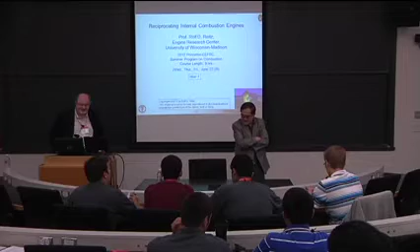It's very nostalgic for me because Professor Reitz and I professionally grew up at the same time period. He's a little bit younger than me - I don't look it. That's in the 70s, mid-70s, late 70s, and early 80s. Those times there was an energy crisis - you guys probably don't know the energy crisis. And it was at the beginning of the golden era in combustion. There's several periods of golden era, and that's one of them. It started from mid-70s.

The mathematicians started doing asymptotics of flame structures. That's the time they started doing that. And then the laser folks from the physics communities, and then computation. It's during that time Professor Reitz came to Princeton, and I came to Princeton too.

After I graduated, I first went to GM to work. I wanted to solve the world's problems, but then I thought I'd do that instead - so I came back to Princeton. That's a career thinking, it's okay. I took a big cut in salary. I came here as a postdoc, but that was the best move.

Princeton was really a very exciting place, even now. I have a colleague, Professor Fred Bracco. Professor Reitz was in his group at that time. And that was when they proposed and started doing computational simulation of what happens in engines, and also used lasers to see what happens there. That's the beginning - not every major engine lab had those things: computational simulation of what happens in engines, and laser analysis. That's the time we started.

So why are we interested in internal combustion engines? As you all know, society relies on internal combustion engines very heavily for transportation, commerce, and power generation. In fact, if you look at this list here, you'll see that they are really pervasive. And that's another reason why the Engine Research Center has been around so long, more than 60 or 70 years, because engines are so important to our society.

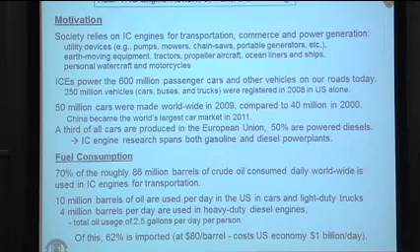They power, for example, the 600 million passenger cars that we have on the roads in the world today. And if you just look in the United States, we have 250 million vehicles. That's roughly one per person. 50 million cars were made in the world in 2009, and you can see that's up significantly from 2000.

And things are changing. China became the world's largest car market in 2011. A third of the cars produced are produced in the European Union, and 50% of those are powered by diesels. So when we talk about engines, we have to worry about both gasoline and diesel engines.

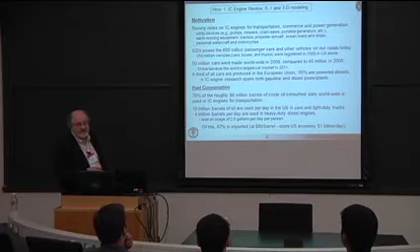Of course, along with this huge number of vehicles and engines comes fuel consumption. 70% of the roughly 86 million barrels of crude oil that we consume every day are used in IC engines for some sort of transportation. And in the US, 10 million barrels are used per day in cars and light-duty trucks, 4 million in heavy-duty vehicles. So it works out to about 2.5 gallons for every person in the United States every day.

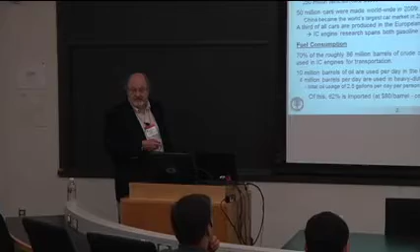And of course, we don't have a lot of it here in the US, so 62% of this is imported. And if you pick a price, here I just picked $80 a barrel, that's about $1 billion a day that we spend on imported oil.

This chart, you can spend hours on, and I suggest you look at it later. It's a very interesting chart out of Lawrence Livermore, I believe. But anyway, it talks about how energy is used in the United States. You'll see that we use 100 exajoules of energy in the year, and it's partitioned in this way here.

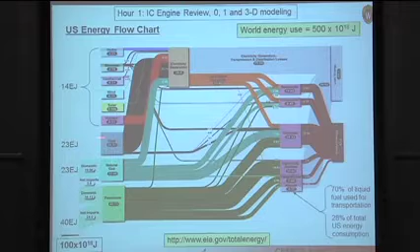40 out of the 100 is in the form of petroleum, and of course 70% of that is used for transportation, as we just said, light duty, freight, and so on. If you look at the other forms of energy, natural gas is about a quarter, coal is about a quarter, and then all of these combined, solar, nuclear, wind, and so on, are about 14. This is a nice number because it's nice and round here, so you can convert these into percentages very easily.

The United States uses 1/5 of the world's energy, so it puts that into perspective. So we're talking about transportation representing about 28 or 30% of the United States' energy consumption. The other interesting thing about this plot is comparing the gray and the brown regions here. The brown regions are useful work. The gray regions are energy that is thrown away.

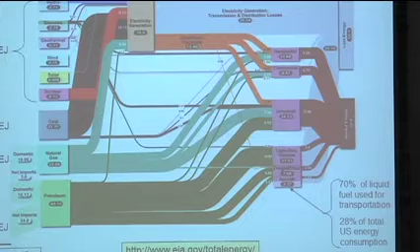And you can see that roughly 60% or 55% of the 100 exajoules here is just thrown away because of losses that occur. So if somebody tells you, oh, they're going to plug in their hybrid vehicle and it's going to be a really efficient car, you've got to go back to this diagram and realize that in creating the electricity, you've already thrown away a huge amount of energy. From that point of view, going from petroleum to a car is actually interestingly efficient.

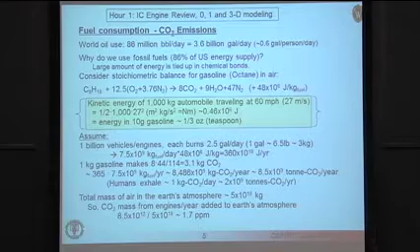So fuel consumption kind of goes along with CO2 emissions. This slide here is just for fun. We're using 86 million barrels a day. That works out to 3.6 billion gallons in the world, about 0.6 gallons per person per day. Remember I said in the US we use 2.5 gallons. So we're kind of using a lot more than our share.

Why do we use fossil fuels? Well, as you know from just looking at this simple balance equation here, we get 48 megajoules per kilogram of fuel from, say, isooctane. What does that mean? Well, if you compare the kinetic energy of a 1,000 kilogram automobile traveling at 60 miles per hour, it works out to about the amount of energy in 1/3 of an ounce, or a teaspoon, of isooctane or gasoline. So a huge amount of energy comes from breaking these bonds and creating CO2 and water.

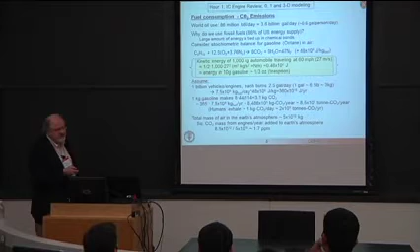So here, this is also interesting. If we compare the CO2 that's produced, 1 billion vehicles, let's just pick that number as a rough number, and let's say that we're burning at the US rate, 2.5 gallons a day, you can figure out that that corresponds to about 8.5 billion tons of CO2 that's deposited into the atmosphere every year. So there's another device that uses energy, the human. We exhale, or our exhaust product, CO2 as well, right? We put out about 2 billion tons of CO2 per year.

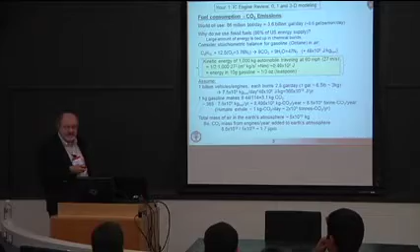It's kind of interesting to look at those numbers because you realize that humans actually put out a lot of exhaust gas. In fact, this is a very rough estimate. The estimates range between 15 and 20% of the total CO2 comes from us breathing. You wonder, well, why? Where's all that CO2 coming from? Well, all that energy that we said that we were consuming that goes into agriculture and transportation and so on, eventually goes to feed us, and we provide CO2.

So if you combine all of these things and do a rough estimate, you can see that every year we're adding about 1.7 parts per million of CO2 to the atmosphere, which is about what people measure. So this is a problem that's not just automobiles.

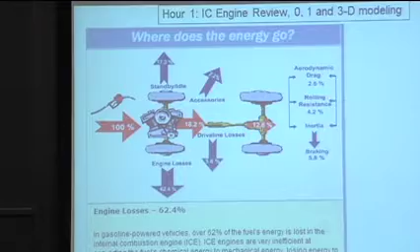If you look at the energy and where it goes, this is a picture that is very illustrative. If we take the fuel as being 100%, and of course it's not, right? Because in order to get the fuel to the gas station, we already lost about 20% from the well to the gas station. But let's just say we had 100% of the energy there. What comes out of the engine is about 18.2% out of this 100. Big loss is the engine. 62.4% is thrown away in the engine, in your typical spark ignition engine.

17% goes in basically standby idle. If you then consider the losses in the driveline, another 5% there, what eventually makes it to the wheels is 12.6% of the total 100. And this is partitioned into aerodynamic drag, overcoming that, rolling resistance, and so on, braking. So if you add this, plus I guess it's useful work, your accessories, air conditioning, and so on, you find that it's about roughly 16% of the total fuel here is actually doing anything useful.

Actually, that number is an overestimate. Professor Heywood has an example where he concludes that actually it's about 1% efficient. Because if you look at what the weight is of a car, it's about 4,000 pounds, typical car, and the average occupancy per person, the weight of the person, and what's required to move that person, you find that the 16% times that weight ratio works out to about 1%. So cars are really inefficient, but we love them.

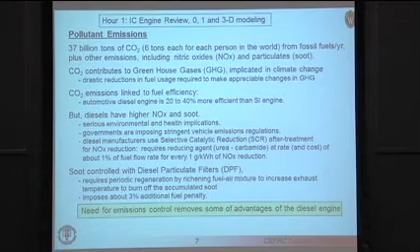Okay, so along with this huge use of fuel is the production of CO2. As I mentioned, 37 billion tons of CO2, about 6 tons per person in the world per year. Of course, other emissions are also produced, nitric oxides, particulates, and there's a lot of discussion about those. Well, CO2 is implicated, as you know from, I'm sure, many of the discussions this week, implicated in climate change. And of course, it's linked directly to fuel efficiency. So you want to look at your engine efficiency.

Diesel engines are 20 to 40% more efficient than spark ignition engines. So that makes the case for diesel engines. However, diesel engines have higher NOx, nitric oxides, which are also implicated in environmental issues, and particulates. So they have serious environmental and health implications. There have been significant efforts to clean up diesel engines, and in 2010, for example, the United States EPA set very tight legislation, with the result that diesel manufacturers now use a variety of methodologies, for example, selective catalytic reduction after treatment for NOx reduction. We'll talk a little about that.

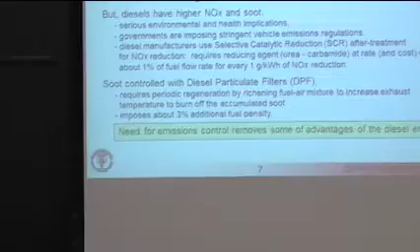This uses a reducing agent, carbamide or urea. And it's not free, right? This is basically the same cost as diesel fuel. And essentially, you have to take that into account when you start looking at fuel efficiency. Also, soot is controlled with filters that have to be regenerated, essentially burn the stuff off the filter. And this imposes additional fuel penalties. When you add these penalties together, this 20 to 40% here is reduced. And that reduces some of the advantages of the diesel, but the diesel is still the most efficient engine known to man.

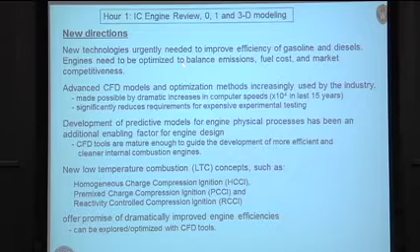So you can see that because of the huge quantities of fuel that we use and the impact on the environment, new technologies are urgently needed to improve the efficiency of engines. We need to optimize these engines to balance the emissions, the fuel cost, and market competitiveness. What I'm going to tell you about in these series of lectures is some of the work that is going on in the area of CFD modeling of engines.

This technology is increasingly being used by the industry to reduce the time that it takes from the inception of an idea to the production of a new engine, and made possible by drastic increases in computer speed. In the last 15 years, 10,000 times faster computers than were used back then.

And this significantly reduces the need for expensive testing. Well, another factor is that the physical processes that occur in an engine are now better understood, and the CFD tools are becoming mature enough to help in the development of cleaner engines and more efficient engines.

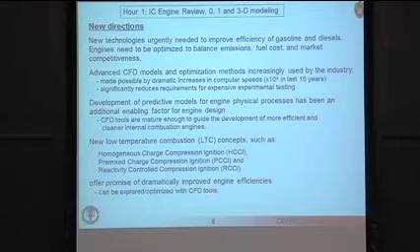New engine concepts have emerged, such as homogeneous charge, premixed charge compression ignition, reactivity-controlled compression ignition, and we'll be talking about some of these. They offer dramatically improved engine efficiencies and can be themselves optimized with the use of CFD tools.

Okay, so let's just talk a little bit about CFD. As Ed mentioned, in the mid-70s, we had the so-called Arab oil crisis here in the US. I remember living here in Princeton at the time. They were rationing gas. You could only buy 5 gallons at a time. And worse than that, the only place you could get it was on the New Jersey Turnpike.

So you'd have to drive down there to the closest exit, fill up your tank, and then use a significant part of that to get back home again. So it was actually a significant event in the history of the United States. And the government essentially said, we need to solve this problem. Let's get the national labs to convert some of the defense codes, the weapons codes, into codes that can be used for engine design by the automotive industry.

So the Los Alamos National Lab and several universities and automotive companies got together, produced a whole series of codes culminating in these Kiva codes that are still to this day widely used in the industry. Other open source codes have appeared, such as OpenFOAM, widely used in Europe.

Along the way, entrepreneurs saw the advantage of commercial codes, and at Imperial College and other places in Europe, codes were developed and commercialized, such as StarCD, the AVL Fire Code, Ricardo's Vectis Code. Fluent was also a player. And then more recently, Converge, Forte, and a number of other commercial codes are available for engine simulation.

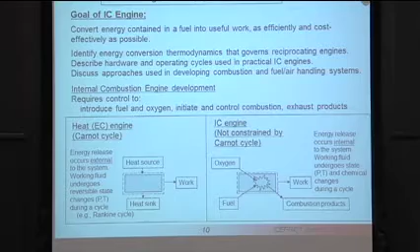A variety of meetings where people congregate to discuss developments in CFD engine simulation, such as the International Multidimensional Modeling User Group meeting sponsored by Cray, and various other Society of Automotive Engineers meetings. Okay, so that's kind of a background on the history of CFD codes. What is it that they're trying to do?

Well, if you look back at what an IC engine does, you want to essentially convert the energy contained in the fuel into useful work as efficiently and cost-effectively as possible. To do this, you have to basically identify the thermodynamics that govern reciprocating engines, describe the hardware and the operating cycles, and then essentially look at the approaches used to develop combustion and air handling systems.

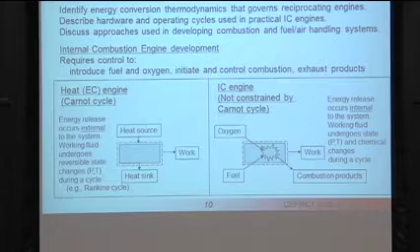So the picture on the right here basically summarizes an internal combustion engine. You have oxygen, you have fuel. They are mixed in some way in the engine. Combustion is initiated and leads to products, and one extracts work. And the important thing to realize here is that the energy release is internal to the system. The working fluid undergoes a change of state from fuel, oxygen to products. And of course, work is extracted during a cycle.

And so some of the restrictions associated with the Carnot cycle do not carry over to the IC engine, and vice versa. So just something to remember, that your textbook Carnot cycle is not necessarily the whole story when it comes to internal combustion engines.

So I'm glad to see many hands were up there, so we don't have to spend a lot of time on this slide. Basically, reciprocating internal combustion engine. We have our piston. Here's the combustion space. We're showing the piston here at top dead center. As the crank rotates, the piston slides up and down. Here's bottom dead center. The air introduction is handled through the opening and closing of intake valves, and exhaust, the same thing.

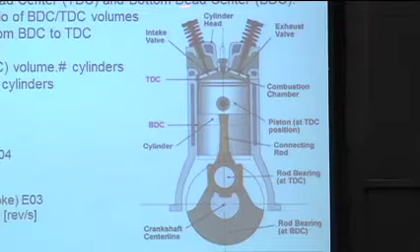Some of the definitions here, we've got top dead center, bottom dead center. Compression ratio is basically the ratio of these two volumes, the top dead center and the bottom dead center volume. The stroke is the distance that the piston travels in a cycle. The bore is the diameter of the piston. The displacement would be the change in volume times the number of cylinders.

And then we have some definitions here, P being the brake power, typically measured in kilowatts. The torque, or brake torque, would be in Newton meters, which is the work that we spoke about in the previous slide. Then there's the brake mean effective pressure, which is essentially a way of gauging the force that's transmitted by the high pressure gases to the piston. The mass flow rate of fuel, grams per hour, and the brake specific fuel consumption. So these are all metrics that we need to take into account when we're discussing engines.

The power is basically the rate of work, so work times the engine speed N here, or torque times speed gives you the power, and here's an equation, if the torque is in Newton meters, speed in RPM. The brake mean effective pressure is the power divided by displacement and the speed. And here again, depending on whether you have a 4-stroke engine or a 2-stroke engine, there's a factor of 2 difference there because we have 4 cycles or 2.

Brake-specific fuel consumption is just a normalization widely used in the industry, which is the fuel flow rate divided by the power. So you'll see BSFC in grams per kilowatt hour. So I spoke about brake. This is what you would measure on a dynamometer, for example, the power produced by the engine. You have brake power.

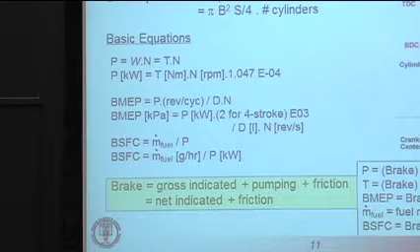As we'll see, the brake is made up of several components. The gross indicated power, or brake quantity, refers to looking at the pressure and its effect on the piston. So that would be essentially the work associated with the thermodynamic side of the cycle. Then in order to get the air in and out of the engine, there's a pumping component that we need to worry about. And then finally, friction. You'll see in many cases the gross and the pumping are connected together, and one sees net indicated for the sum of gross and pumping.

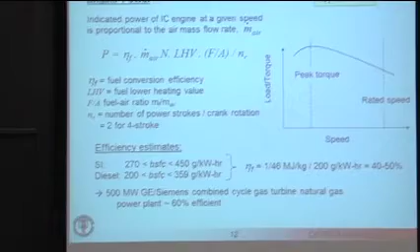Okay, so engine power then, the indicated power is proportional to the amount of air you can get in the engine. So this m dot air is an important parameter here. Also the fuel conversion efficiency, or the efficiency of the entire process. The lower heating value of the fuel, and of course engine speed here. That's converting from work to power. The fuel-air ratio, and then whether it's a 2- or 4-stroke engine.

So we're typically interested in several points on the load speed map of an engine. This curve here is typically called the lug curve. Essentially, it tells you the maximum load you can have at a given speed for an engine. There's a peak torque point and a rated speed point that's of interest. Looking at these numbers here, these are just typical numbers that you'd see in the literature for brake-specific fuel consumption for SI and diesel engines.

And you see they range all the way from 450 for SI engine down to 200 for a diesel engine. So one can kind of estimate what the fuel conversion efficiency is. And you see it's in the range of 40 to 50% if we're at this relatively low BSFC of a diesel engine.

It's interesting to compare that number with the number of, say, a 500 megawatt combined cycle gas turbine natural gas power plant. These power plants have just recently broken the 60% efficiency mark. They're combined cycle, so there's regeneration. They feature things like thermal barrier coatings on the turbine blades, and very sophisticated, millions of dollars of investment go into producing one of these power plants. Internal combustion engines can reach up to 50 and even higher for very large engines. So they're not that different.

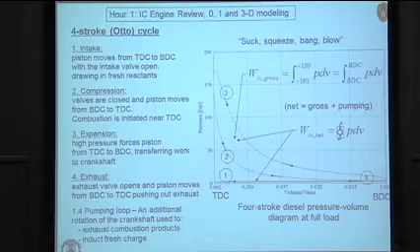Again, this is out of your undergrad thermo or IC engines class. Just shouldn't take a lot of time on this. Basically, if we start with the piston at top dead center, we suck the air in to the combustion chamber. Piston goes to bottom dead center. Then we start the compression process, close the valves, compress the gas. That's our squeeze here. Then we have bang, which is the combustion, and then the expansion process.

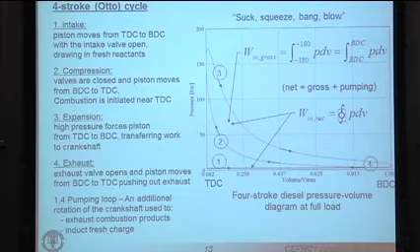And we open the exhaust here, and then we blow the gases out of the chamber. So that's just summarized over here. You'll notice there's two parts to this diagram. This part here, which essentially is the compression and the expansion strokes, and then this part down here, which looks very skinny on this plot, is the pumping loop, the part where you pump the air in and pump the air out of the engine. The engine is, in some ways, just a pump.

The combustion process is typically initiated near the end of the compression stroke, maybe through a spark or through auto-ignition in the case of a diesel engine. The ideal combustion process is a constant volume process that occurs instantaneously at top dead center.

In a spark ignition engine, we initiate the combustion process with a spark, obviously. The air-fuel mixture is pre-mixed from entering through the intake port past the intake valves, and then we spark it, and combustion is initiated. For the compression ignition engine, we typically compress just air. At a certain moment, we inject fuel, and then we rely on the ignitability of the fuel, spontaneous ignition, to take place at the right time in the cycle.

Sometimes you'll see that diesel is portrayed as a slower combustion process. Instead of constant volume, it's represented as constant pressure. And that's because the combustion process can actually be controlled by the fuel injection process. So depending on how long you take to inject the fuel, you can change the shape of the heat release part of the curve. Okay, so that's kind of all I want to say about the fundamentals of engines.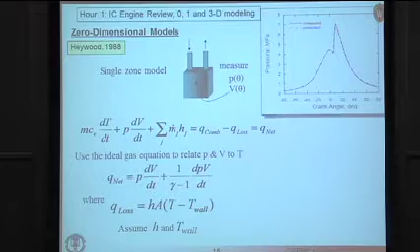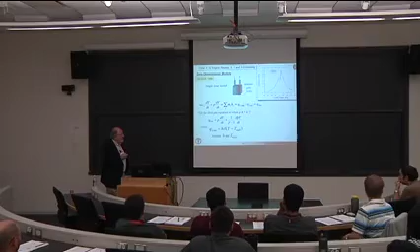And so one can actually measure the pressure with a transducer placed anywhere in the chamber. And knowing where the piston is located, one can calculate the volume and see plots like this, where you'd have measured and predicted cylinder pressure versus crank angle. To understand this a little better, one can look at the first law of thermodynamics, where we have essentially the change of internal energy in this volume, the PdV work, that's the work associated with moving the piston.

When the valves are open, we have mass transfer between externals and the chamber. So m dot would be the mass flow rate into the engine, for instance, and the enthalpy carried by those gases. And that must equal the terms associated with heat transfer or combustion. So the combustion releases energy, the heat losses to the walls and so on corresponds to Q loss. Difference between these, of course, is difficult to get in experiment, so we call that net.

If we throw out this term, because now we're looking at just the closed part of the cycle, we can use the ideal gas equation to get rid of T here and relate it to the pressure and the volume, and basically we get this result, which tells you essentially the difference between combustion and heat losses, or the effective energy release in the engine as a function of the measured pressure and the instantaneous volume. So if I can use that equation and apply it to this experimental data, I can get a curve that looks like this, which is the apparent heat release rate, Q net here, as a function of crank angle.

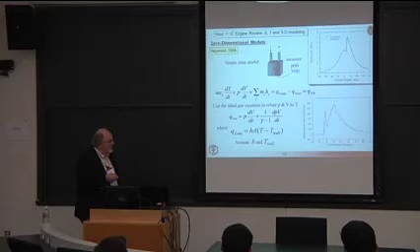You'll notice that for diesel combustion, which I'm showing you here, it's kind of interesting. It has two bumps. First bump is associated with what's called the ignition delay, where essentially you start injecting the fuel. At a certain moment, all the fuel that has been injected spontaneously ignites, giving you this rapid rise in heat release. And once you've burnt away that fuel and the injection continues, you then have a more controlled burn, the so-called diffusion burn. So we have what's called a premixed burn and a diffusion burn.

We can extract a little bit more information from a plot like this by using some kind of empirical relationship for the heat loss term involving the heat transfer coefficient, the surface area of the combustor, some estimate of the wall temperatures, and the temperature, again, coming from the ideal gas equation, for example. And actually back out Q combustion. Generally, what you find, though, is that this effective heat rate here is very close to the combustion rate.

Okay, so three-dimensional models. Now we look at the partial differential equations that describe the combustion process in the engine. For the 0D model, we were just looking at time variation. Now we need spatial derivatives as well. You've seen these equations before. This is mass conservation. Here's the rate of change of density in maybe one of the computational cells in your domain. This would be the flux of mass in and out of that cell.

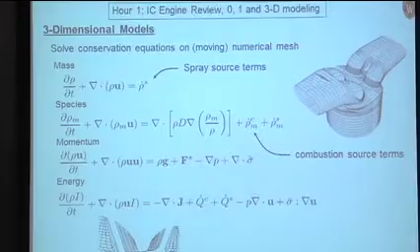And this would be a source term that may be due to mass being deposited in a cell from vaporizing droplets, let's say. For each of the species, now we have a partial density for each species, M here referring to that particular species. We have a similar equation, but now we have diffusional terms as well.

We need a diffusion coefficient. We have combustion source terms and also possibly spray source terms.

Here's our momentum equation. We have drag forces associated with the spray. We're going to talk more about those tomorrow.

And then looking at the energy equation, again, we have convective terms. I is the internal energy in our computational cells. Here's our heat flux and species flux terms, combustion, heat generation.

A heat transfer term associated with the spray. As the droplets vaporize, they essentially take energy from the gas. Here's a PDV work like we saw before, and then a dissipation term.

So those are the equations that are solved in codes like Kiva. This reference here to the Kiva manuals gives all of the equations in great detail, so I'm not planning to spend much time on them at all.

One of the things that's really important in engines, though, is turbulence. And as we'll see, it explains why engines work. So this is a one-slide review of turbulence.

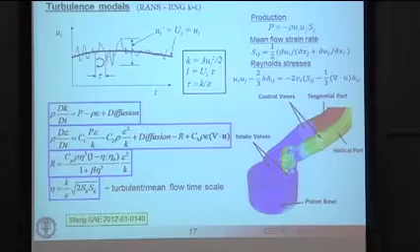If you take a probe in a turbulent flow and you measure the velocity as a function of time, you'll get this wiggly line here. All right. Now, what does that mean? Well, essentially, we have velocity fluctuations about a mean.

The mean is shown with this capital U here, would be the solid line. And the U prime would be the fluctuating velocities. Those fluctuations are characterized also by a time scale associated with the turnover of eddies in the turbulent flow.

And models have been developed to try to describe this turbulent flow. And one of the most successful is the Reynolds averaged Navier-Stokes models, or the renormalization group K epsilon models. So K basically is to take that fluctuating velocity term and convert it into a kinetic energy. There should be a prime there.

Associated with the kinetic energy associated with these fluctuations are length scales of these eddies. I mentioned the time scale. If we multiply by the mean flow, we can derive a length scale using Taylor's hypothesis.

And then another quantity that's of interest is epsilon, the so-called dissipation rate of turbulence, which you can get knowing the turbulent time scale from this equation. Or vice versa, if we have an equation for the dissipation rate, we can get the time scale.

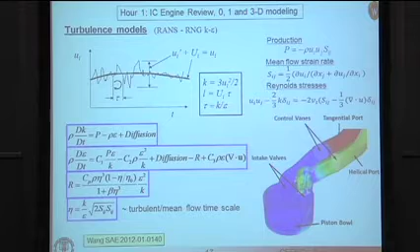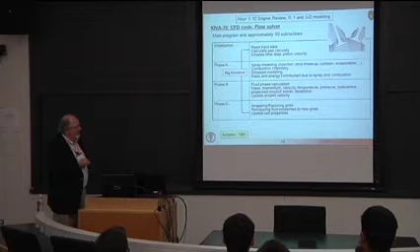In phase B, you do the fluid phase calculations, as described here. And then in phase C, you remap the mesh. So one of the things that's interesting there is how do you handle a moving piston. So this might be a picture of your mesh at a certain time. This refers to the position of the piston in that mesh.

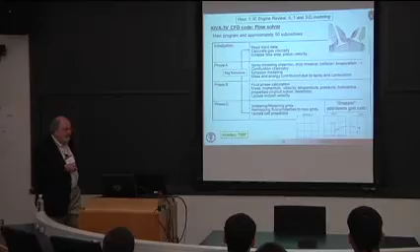During a time increment, your piston may move to a new location. Once it's moved far enough, you decide, well, I'm going to combine these two cells into one cell. So essentially, you remove this boundary here, so now you have just one cell. And now the cell below is no longer active in the calculation because that represents part of the piston. So this snapping approach allows you to deal with moving valves and moving pistons, and is very effective for these types of geometry varying calculations.

Okay, so let's look at one-dimensional codes just very briefly. They are widely used in the industry. As I mentioned, AVL and Ricardo also have multidimensional codes. Probably the most widely used code in the industry is from Gamma Technologies, so-called GT Power. And what these codes do is they can predict wave action in the manifolds by writing down the conservation equations in one dimension.

So for example, in this picture you see here, if the piston moves a little bit and the valves are open, I need to communicate that information with the outside world and draw in, suck, in the words we used earlier, fresh air into the chamber. However, you notice that it takes quite a while for that information to get from the piston all the way back to the environment to tell the environment that the piston has moved.

And in fact, if we had a 1 meter long resonant duct here, you can see it would take, with the speed of sound, 330 meters per second, about 3 milliseconds before the outside world knew that the piston had moved. If you look at an engine operating at 1800 RPM, 1 crank angle degree is 0.1 milliseconds. So this corresponds to about 30 crank angle degrees of movement to get information back and forth through this duct. Well, all of this wave propagation is calculated for you in these one-dimensional codes.

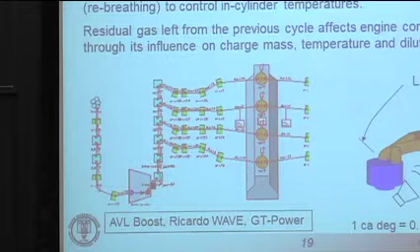So just looking at the equations, basically we're dealing with a one-dimensional model here. So we subdivide our domain into steps of dx. Of course, the cross-sectional area at each position down the duct has to be specified so that the volume of each of these cells is the area times dx. And then one applies the Reynolds transport equation, which essentially allows you to derive the conservation equations for mass, momentum, and energy. And I'll just write them down here.

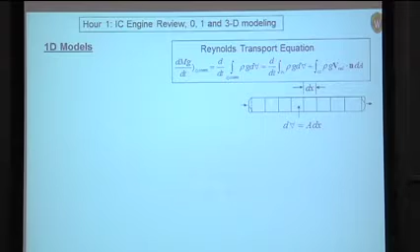This would be your mass conservation equation for density changes for the local cross-sectional area A, and the one-dimensional velocity v. These variables are functions of x and t, space and time. Here's your momentum conservation equation, pressure gradient, and then this term here represents the effect of friction, which of course in a one-dimensional flow you can't really calculate because friction is a multidimensional effect at the walls. So you have to specify a friction factor, and that's typically done using some correlation for the wall friction.

Similarly, for energy conservation, we have a dissipation term that involves that friction, and then we have a heat loss term that may have to use a wall heat transfer correlation to provide the local heat transfer. And here's our PdV work again. So these are the conservation equations that are typically solved in one-dimensional models. And you can read up on those in various textbooks.

Of course, the gas exchange process is more than just a one-dimensional problem. We have to deal with the flow as it enters past the valves. There are significant losses associated with the flow speeding up through that valve area. It's very dependent on the history of the valve lift, shown here, for example, the exhaust valve lift as a function of time.

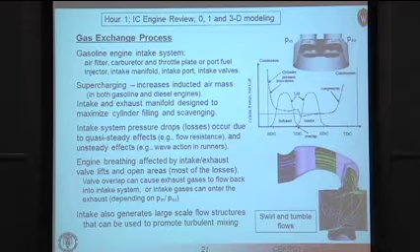So essentially what you need to do in a one-dimensional flow calculation is use experimental data to correlate flow effects with, say, swirl in the chamber or with flow losses across the valves.

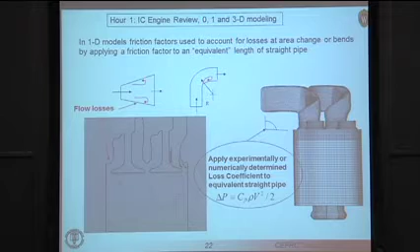So this kind of just says what I just said. You might use a multidimensional calculation to actually calculate the pressure drop associated with the valving, and then feed that into your 1D code. Flow losses that occur at bends, such as the flow not being able to negotiate a tight bend, can also be included as lookup parameters in a 1D flow code. In fact, in those 1D codes, most of the code is associated with these types of models that are read in.

For example, in the Ricardo Wave code for duct bend losses, we're dealing with a duct that has a change in cross-sectional area and a change in direction of the flow, so there might be some sort of flow separation taking place. Correlations have been developed that are used in the code that take into account the change in diameter, the radius of curvature of the duct cross-section, and so on.

So a lot of work has been done over the years to make these codes smart. Of course, we want to run those codes because they run a lot faster than multidimensional codes.

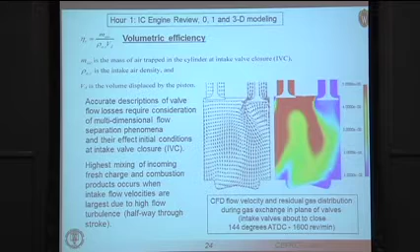Well, why are we interested in this? One of the main parameters that affects engine performance is how much air you can get into the combustion chamber, and this is essentially referred to as volumetric efficiency in the literature. So m dot air, or m air, is the mass of air that you can trap in the cylinder when the intake valves close. The air density is important, and of course the volume of the combustion chamber - the product of these two is the mass.

So this volumetric efficiency depends on losses that occur as this flow speeds up past these valves, the nature of the flow field itself, and really you can only get this type of information from either experiment or from detailed 3D calculations like I'm showing you here.

Not to be outdone, in the 1D codes, the user has to provide tables of flow coefficient or flow loss as a function of the valve lift to diameter ratio. So this is just an example of an input to a 1D code that essentially is the flow coefficient versus the valve lift normalized by the valve diameter.

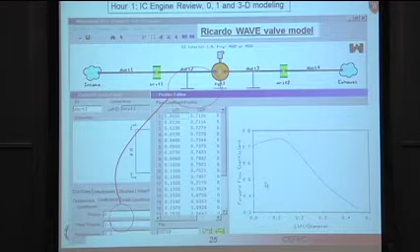So here's a very simple layout for a Ricardo Wave 1D code. We have our intake environment, atmosphere here, a duct, and here we have just a simple union. This region here is handled by the valve, and the flow coefficients are then read in, as you see here. On this side would be the corresponding exhaust - we would have a similar looking lookup table for the exhaust valve flow coefficients.

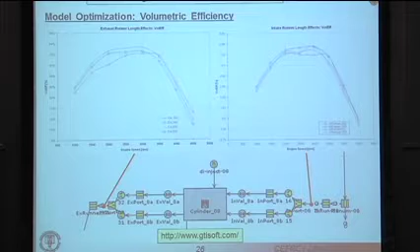There are 4 different cases going from 300 to 600 millimeters. This axis is volumetric efficiency, and there's quite a significant change, especially at low speed, because the length of that duct has to do with information propagating from the environment back to the cylinder.

The plot on the right shows the same thing, but now we're changing the length of the intake runner. Again, over a certain range of speeds, this has a significant impact on volumetric efficiency. Notice it drops off at low speeds and also at high speeds. We'll talk more about that in a minute.

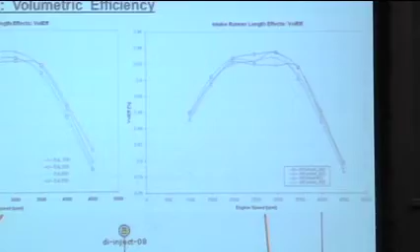Another way of optimizing volumetric efficiency is to change the valve event itself. Here we see the valve lift curve as a function of crank angle, the exhaust valve open and close. Using cam phasers, we can move the whole profile left or right depending on engine speed. For example, here the entire profile is delayed, minimizing the amount of valve overlap. This has a significant effect on volumetric efficiency.

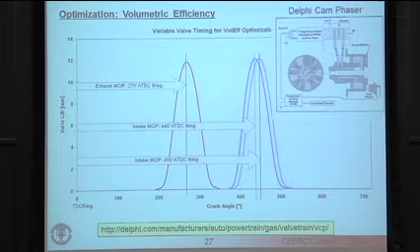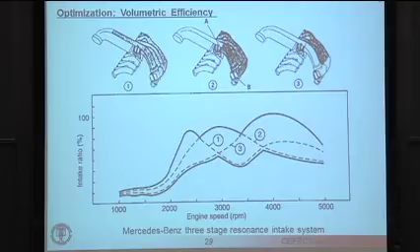This idea you'll see represented in many different forms. This was an early concept from Mercedes-Benz, a 3-stage resonance intake system. It's a little hard to see in this diagram, but the fresh air comes in through this duct, and you'll notice there are 2 butterfly valves. These valves can be opened or closed, and when they are, effectively you change the length of the runners going into the combustion chamber. For the shortest runner length, the volumetric efficiency follows curve 1 here.

If we then open and get an intermediate runner length, we can get curve 2, while the longest runner length gives curve 3. So by appropriately changing the length of the runners, and essentially using this resonance effect, we can maintain a high volumetric efficiency over the whole engine speed range.

So those of you who may have been involved in Formula SAE at your universities probably know all about this. How many were involved in that? Okay, quite a few, so I'm lecturing to the choir here.

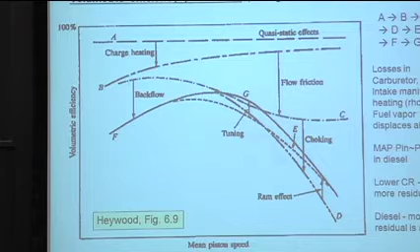The next is going down to curve D here, and that's what's called choking. If at any point in the system, and Formula guys know this one as well, the flow reaches sonic velocity, the flow passage becomes choked. You cannot get more mass flow through the system, and that leads to this big reduction in volumetric efficiency as a function of speed.

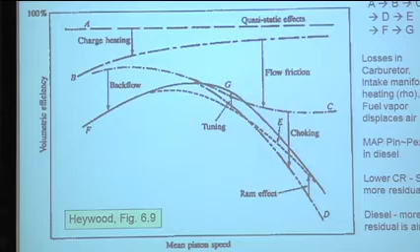Now the next effect that brings you up to curve E is the so-called ram effect, where if the gases are already moving into the combustion chamber and the piston starts moving up, you would want those gases to go out of the intake valves if they're still open. But because of the fact that the gases are already moving into the chamber, you can force more air into the chamber than you would normally be able to do, and that's the so-called ram effect.

And then finally, to get us up to line G here, is the so-called tuning effect, and that has to do with those resonances associated with the length of the passages that I discussed before. So if you combine all these things together, it explains why there's kind of an optimum in the volumetric efficiency for a particular speed, and why you want to spend some time designing the manifold system for an engine in order to cram as much air as possible into the combustion chamber.

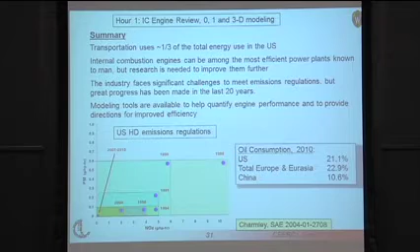Okay, so just to summarize this first hour, transportation uses about 1/3 of the total energy use in the United States. Internal combustion engines can be among the most efficient power plants known to man, but research is needed to improve them further, and we're going to be talking about that in this series of lectures.

Just looking back at the energy use here, it's interesting to see the US uses about 20% of the world's oil, China 10%, Europe, Eurasia another 20%. These numbers are going to change, obviously, as China, for example, uses more fuel. That's going to lead to significant problems in the future, in my opinion, in the opinion of a lot of people. So industry really faces significant challenges, and one of them also involves emissions regulations.

This plot here, we'll be talking more about emissions later, but it summarizes where diesel engines have come in the last 20 or 30 years. Prior to 1988, there were no restrictions on NOx. Engines were running with 10 grams of NOx per horsepower hour. It's a huge amount of NOx. Right now, in 2010, engines have to run with 0.2 grams of NOx per horsepower hour. So huge reduction in NOx.

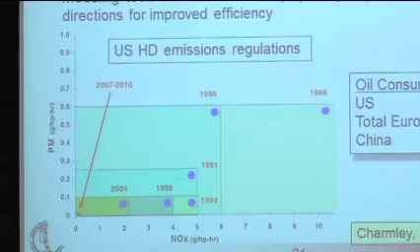And here's particulate. Again, no standards prior to these dates. Now we are down at 0.01 gram per horsepower hour particulates. So this is what engines of today look like. Major accomplishments in terms of cleaning up engines. So, any questions? My plan is to kind of give you half of the next lecture now, and then we'll break at 10:15.

Yeah? From a modeling point of view, what temperature range are we typically looking at in engine modeling? Do we go all the way from room temperature to like 3,000 Kelvin? Right. So in a spark ignition engine, naturally aspirated stoichiometric engine, the temperatures can be 2,700 Kelvin or higher, 2,800. At the lower end? Room temperature, yeah. And pressures? So again, depends on the engine. You know, heavy-duty diesel engines can go up to 200 megapascal type of pressures. Typically, for a spark ignition engine, you're at 120, 130 megapascal. We need bars or PSI. Bars, thank you.

Yes? What are the main differences between HCCI and RCCI? We're going to talk about that a little bit later. I can just summarize in one step here. HCCI is homogeneous charge compression ignition. So the whole chamber is filled homogeneously with a fuel-air mixture. PCCI has gradients of fuel-air mixture in the combustion chamber. RCCI is like HCCI, but it has gradients in fuel reactivity in the chamber. And we do that with two fuels, one reactive fuel and one less reactive fuel. And we'll discuss that later.

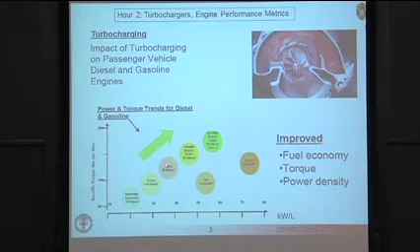Okay, turbocharging. So remember I said you want to get a lot of air into the combustion chamber. Well, a turbocharger is one way to do that. And if you look at the trend in the industry, you'll see for both diesel and gasoline engines, turbocharging is now becoming pretty much a necessity. Here is your naturally aspirated diesel, indirect injection diesel. Here's a turbo diesel. Here's a naturally aspirated gasoline engine.

I'm measuring torque here against specific power in kilowatts per liter. You can see this trend of increasing torque, increasing power density, and it's really associated with the turbocharger. How much air can you push into the combustion chamber? Because the more air you have, the more fuel you can put into the engine, and therefore the higher the power output. So the purpose of turbocharging is to increase the air density, the amount of air.

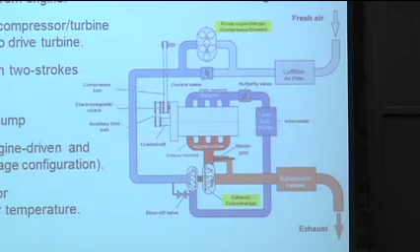Here's our charge air cooler, because once you compress that gas, of course, it heats up, and you've got to get rid of that heat. So this becomes a major issue for the entire system, right? You've got your engine here, but now you've got another engine over here to deal with, plus heat rejection.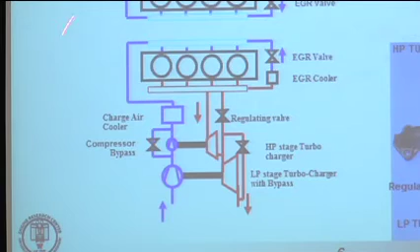And in fact, some systems are even more complex, where you'll have a low-pressure turbine followed by a high-pressure turbine. In other words, the exhaust gas drives first a high-pressure drop turbine and then a low-pressure turbine. And of course, in a multi-cylinder engine, you may have several of these devices hooked up, like in this case for a V8 engine. You're going to have 4 of these things. Here's a picture of one of those.

These things can be modeled in GT Power and those other codes that I mentioned as well. And so one can look at the performance of the entire system with those system simulation codes. And that's routinely done by all of the engine manufacturers.

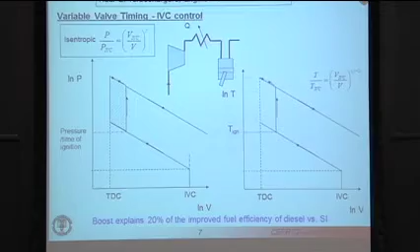This chart here just sort of summarizes something I wanted to mention. So here we have our compressor, then we have a charge air cooler, and then the piston cylinder arrangement here. If we plot cylinder pressure versus crank angle or volume, in this case, going from the volume at intake valve closure to top dead center, and if we assume isentropic compression, we follow a line like this.

Now, during this process, the temperature in the chamber is also increasing. And if we had a pre-mixed mixture of fuel and air, like in an HCCI engine, for instance, a certain temperature would be reached where combustion would take place. And if the combustion was very fast, like in HCCI combustion, we would have a constant volume combustion process.

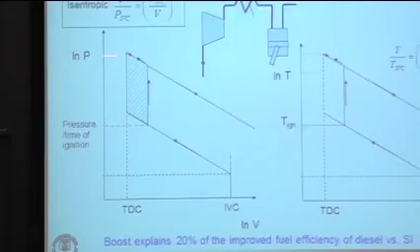Piston's still on the way up, so we would have some compression, raising the pressure and temperature to possibly values that exceed those of the design of the engine. And then we would follow an isentropic compression, expansion path. So all of this shaded area here is work that is thrown away, potential work that's thrown away, because we had combustion taking place too early.

So one of the things that's key here is to get the combustion to take place at the right time, which is, as you can see from these diagrams, ideally at top dead center. So if we add a compressor, like we see here, essentially at intake valve closure, everything moves up, right? Because this is the amount of boost that has been provided by this compressor. And you can see that we might even have a worse situation, reaching even higher pressures in the combustion chamber that could lead to damage in the engine.

With the charge air cooler, though, we can keep the temperature the same as it was before. So we still follow this temperature plot here. If, however, we delay the time that the intake valve closes, so we can start from this boosted pressure here and start from a lower temperature, essentially the temperature that we would have had coming out of the charge air cooler here. And now, when we compress, we can reach this ideal state where ignition takes place at top dead center.

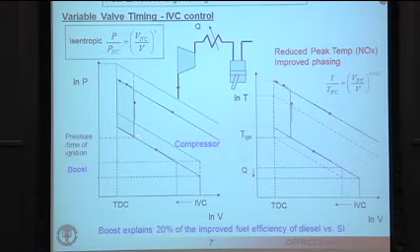So in that case, what we've done is essentially we've regained this shaded area that was lost. So the combination of variable valve timing or intake valve closure control together with boost and charge air cooling is very effective in engine combustion. And those are tools that designers use.

Okay, so getting back to the compressor, this is a picture of it here. Typically, these are centrifugal compressors. They run at pressure ratios up to about 3.5. They run at very high speeds, 100,000 RPM, for example. If you want to understand compressors, it turns out that a really good assumption is to look at them as isentropic compression devices, or expansion devices in the case of a turbine. You remember this from your thermal classes probably.

So if we just take a quick review of isentropic compressible flow theory, there's only one equation that's really important, and that's this one here, that relates the stagnation temperature, the temperature when the gas is not moving, to the local temperature and the Mach number. How do you get this? Well, this comes from the energy equation when you assume no heat transfer and no frictional losses. In other words, du and the PdV term only. This is the equation that you derive. If you assume isentropic flow, you can actually get the pressure ratio also from that same equation.

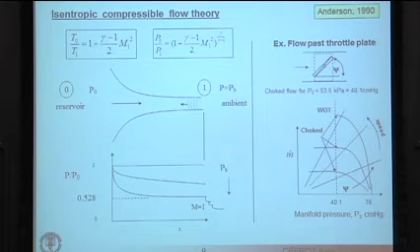If we lower the ambient pressure enough, in fact below 0.528 here, which depends on your value of gamma, which I've assumed to be 1.4 for diatomics, you reach the point where the flow at the exit becomes sonic. The Mach number becomes equal to 1, and the flow becomes choked. And we spoke about that earlier. So now, no matter what you do with the ambient back pressure, you cannot get any more flow through that nozzle. So an example where that becomes critical is flow past a throttle plate in an SI engine. So here's a throttle plate in a duct.

Depending on how you open this throttle plate, the cross-sectional area here becomes different. And so for a fixed position of the throttle plate, you get a plot, as I've shown here, of the mass flow rate through the duct as a function of the pressure drop, or the manifold pressure. That would be the downstream pressure here. This is in centimeters of mercury, so 76 is atmospheric here, 40 is 0.528.

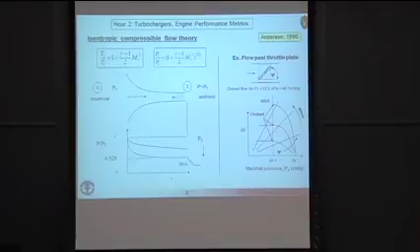So as you decrease the back pressure, or throttle the engine, you get more and more mass flow up to a certain point where the flow becomes choked, becomes sonic. Now if I want to, I can open this throttle a little bit more and move to a new line here, in which case the choking occurs at a larger area and I can get more mass flow through the system. So these curves of mass flow versus pressure are kind of fundamental to this flow situation that we've described here.

In the case of turbo and compressor, instead of having a converging flow here generating this change in pressure, we're using a wheel that's essentially speeding up the flow in the compressor device. Okay, so this leads to an equation that's called Fliegner's formula. Essentially, it says how much mass flow can I get through a duct. The mass flow is the density times the area times the velocity.

And if you work through the math here, you can see that for the choked flow situation, where the Mach number or the velocity is equal to the speed of sound, the Mach number is 1, it depends on the reservoir pressure, the reservoir temperature, and the local area. So that's Fliegner's formula. And this is used in the compressor and turbine community to essentially provide a measure of the effective flow area in a duct by normalizing this mass flow rate by a temperature, the square root of

temperature, and pressure ratio. And so you'll see plots like this of normalized mass flow rate and normalized pressure and the choke flow point. And these different lines correspond to different passage areas. So you'll see that kind of plot when turbo machinery is characterized.

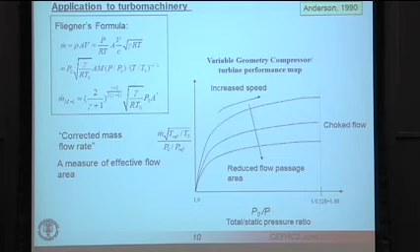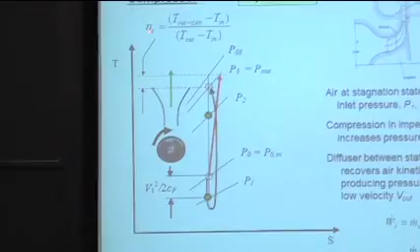Of course, in reality, the flow is not isentropic, and there are losses. And so one has to introduce this quantity here, the compressor efficiency, eta C, which essentially measures how much entropy is introduced that deviates from the ideal process.

So looking at this diagram here, this is a compressor map that a compressor manufacturer would provide with their compressor. This is the pressure ratio. This is the mass flow rate. So if you rotate this plot and turn it backwards, it's the same as the ones we saw before for the throttle valve problem. You have your choked flow point on this side here. On this side, you have the so-called surge line.

This represents at low mass flows and high pressures, you can have flow separation in the ducts within the compressor, and is referred to as the surge line, as you see here. So essentially, a compressor works between the surge limit and the choke limit. These islands that you see here are lines of constant compressor efficiency. Typically, you'd like to operate in this region where the compressor efficiency is the highest.

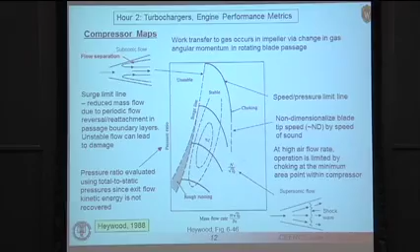These different lines correspond to different speeds of the compressor, different blade speeds, which is like opening the area when we were talking about the throttle valve situation. So again, Heywood is a great reference if you want to learn more about compressors.

Yes, just an example of a practical compressor map taken from a GM 1.9 liter diesel engine. You can see the compressor speeds here going up to 190,000 RPM and down to 35,000 RPM. This would be our pressure ratio and our corrected mass flow rate on this plot.

For turbochargers, we have basically the opposite of a compressor if you look at it on a TS diagram, where now we want to take potential energy from the high pressure exhaust and transmit it through the impeller to generate high velocities in the turbine.

Go through the same kind of analysis. Here's our corrected mass flow rate curve again, using Fliegner's formula. Corrected blade speed, which again essentially non-dimensionalizes the RPM of the blade with the sonic velocity, which goes as the square root of temperature. Again, there's a turbine efficiency we have to worry about.

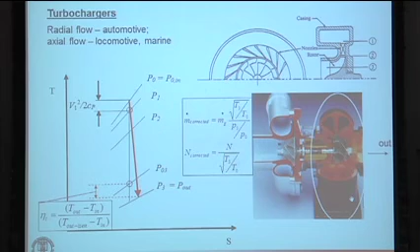The picture you see here is for a radial flow turbine. These are typical for automotive applications, but there are other turbochargers, the axial flow type, that are used typically in large engines. So the whole point of this is to take the energy in the exhaust gas and convert it into motion of the impeller, which then drives the compressor.

So this plot kind of summarizes this whole concept. Here's a PV diagram once again. Here's bottom dead center of the piston, here's top dead center, here's the compression stroke from 1 to 2. Then we could have isochoric, or constant volume, combustion like in an SI engine.

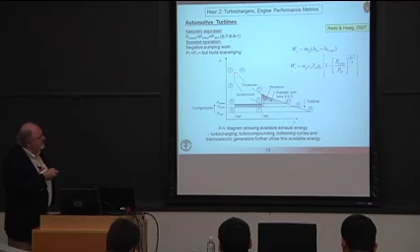That's the idealization. For diesel combustion, you might have constant pressure combustion as an idealization. Then you have the expansion stroke, and at point 5 here, the exhaust valves would open, and you have what's called the blowdown process. Now, in a typical application, you would blow down in a naturally aspirated engine to atmospheric pressure.

But in reality, what we'd like to do is take this energy that is potentially available if we were to allow the piston to move further down, and use it to drive the turbine. So the energy in the shaded area here can be used to drive the turbine, which then in turn drives the compressor, which allows you to increase the intake pressure.

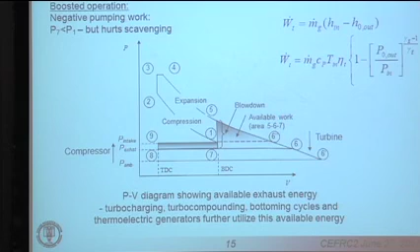So this part down here, if you recall, was what we call the pumping loop. Going from 5 to 7, you blow down during the exhaust process. Here you push the gases out of the engine. Now the intake valves open, and here you draw in the fresh gas, and then you start the compression again.

Turns out that if the intake pressure is higher than the exhaust pressure, or in other words P7 here is less than P1, the effective pumping loop is such that you actually gain energy. So you would like to have your intake pressure higher than your exhaust pressure, because essentially then you are gaining some work during the cycle.

Remember, the work is the area under these curves. So here you can see this area would represent the energy released from the combustion process, and this area would represent the pumping work. This can be arranged if you arrange the turbine and the compressor appropriately. It's not always possible to do it, but it's helpful to have the intake pressure higher than the exhaust.

The only caveat is this can hurt scavenging, because if the intake pressure is higher than the exhaust and the two valves are open at the same time, you can have that short circuiting that I mentioned, where the intake flow can go out the exhaust.

Okay, so anyway, this diagram here, if you think about it, is essentially saying that there's still significant expansion energy available when you reach the exhaust valve open time, and you can use that to drive the turbine.

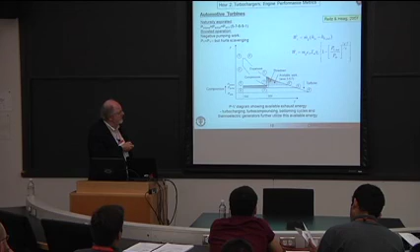The turbine work then is the mass flow rate through the device times the change in the enthalpies. Once again, you can relate that using the isentropic flow assumption to a pressure ratio across the turbine and to a turbine efficiency.